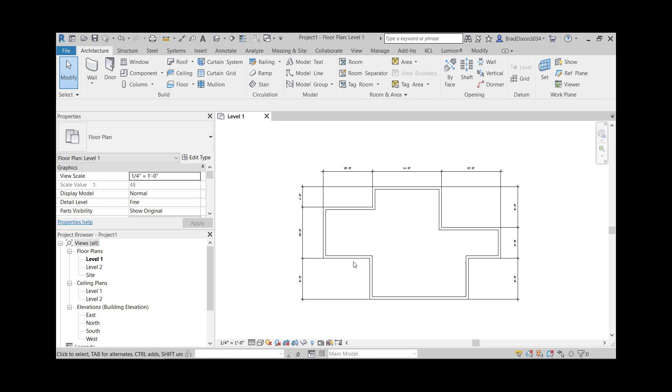constraint-driven dimensions. Whenever I'm laying out a floor plan, I just have a very basic floor plan here, someone might have sketched this out on a piece of paper and said this is kind of what I want for my exterior dimensions. So whenever I'm actually going to do this in Revit, I'm going to show you the workflow that I would go through. I'm going to start out with a generic 6-inch wall, and I'm going to start drawing this.

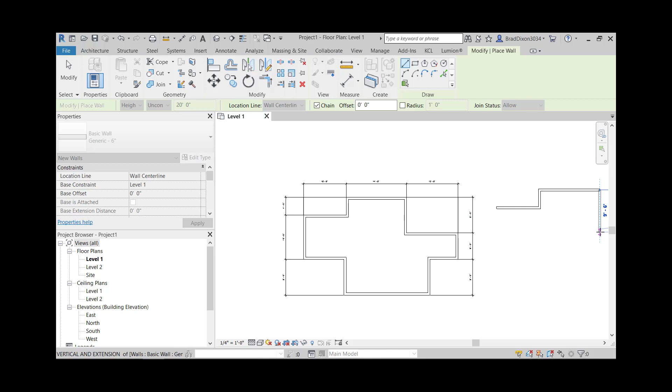A lot of people would spend a lot of time trying to get that first dimension to be 10, then the next dimension to be 4, then the next to be 14, or they might type those in as they're going, and then as I change things, those don't work anyway. So what I do instead, I don't use those temporary dimensions.

Instead, I just go around and get it close. My first one is about 10 feet, so I'll go there. Next one's up about 4 feet, I'll go there. I'll come over like that, drop down here, take this one over like that. I'm just kind of getting that similar shape that I have for the rest of them.

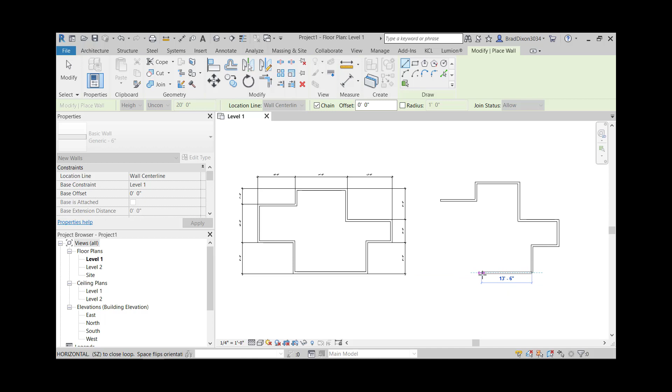So I'll go through and do this. Then, instead of using temporary dimensions, which show up whenever you click on the wall, what I'm going to do is add permanent dimensions at this point.

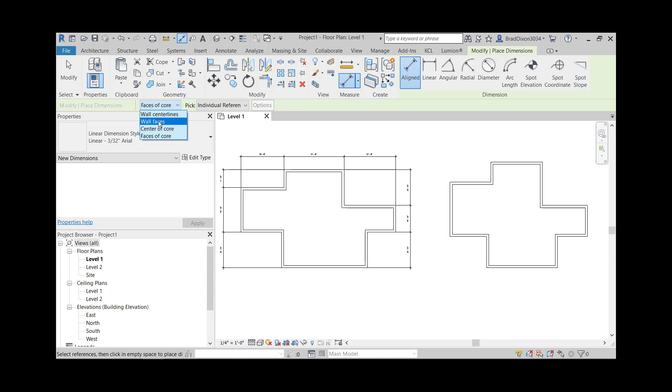I go over to Annotate, choose Aligned Dimensions. I come up here and make sure I'm going to use wall faces. I can't use the wall center lines for this. I'm going to use my wall faces, and pick the outside of the wall. I stay away from the corner because I don't want it to pick the wrong thing. I pick the outside face of that wall, the outside face of that wall, the outside face of that wall, and the outside face of that wall.

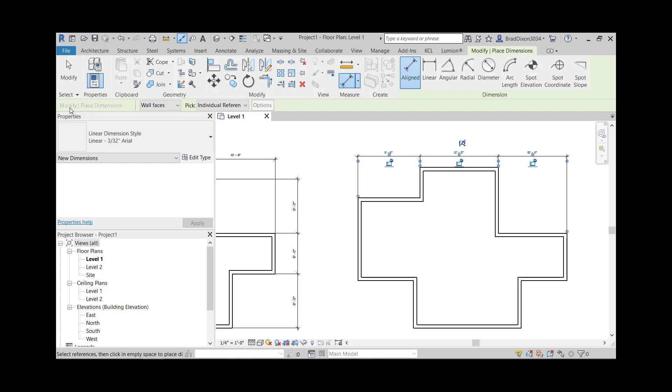I bring them up here and drop them. You notice I've also set the scale to 1/4 inch equals a foot, which is going to be my permanent scale. Rather than waiting until later to change the scale, I get that set up now so my dimensions look good. If I would have left that at 1/8 inch equals a foot, the default, it looked like that. So I'm going to put that back to 1/4 inch equals a foot.

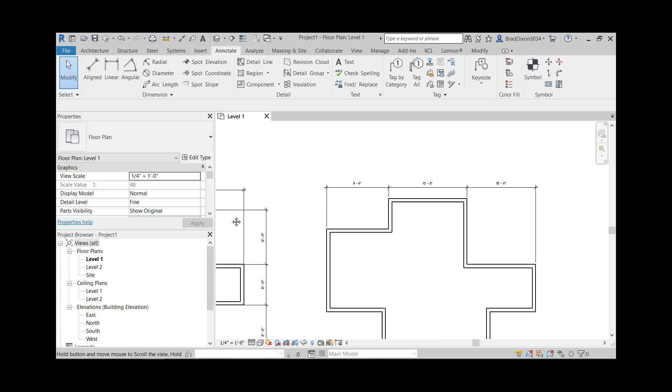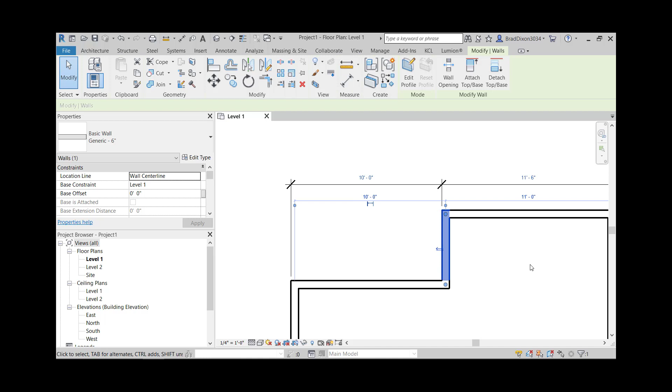It's another little tip. Then I'm going to move over, click on this one, make that 14, and then come over here and make this one 12. So it automatically forced those to be those dimensions. Now I'm going to do this side. Again, aligned dimension, and the nice thing about having this as the wall face, I can just click real quickly.

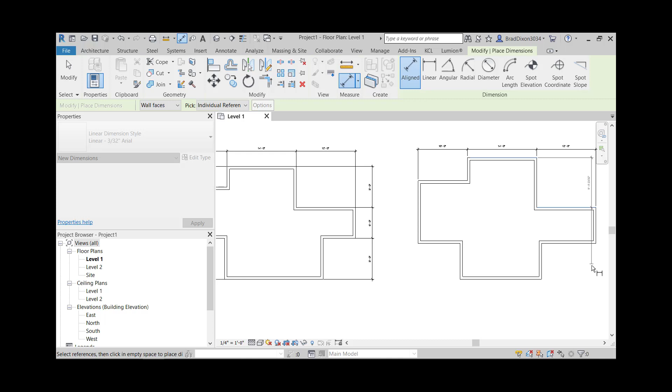Now in this case, I purposely left this one out, and I'm going to show you why in a second. So I'm going to zoom in on this. I have 8 foot and then 8 feet. I'll click there and click on the permanent dimension, type in 8. Then I'll click on this one, click on the permanent dimension, click 8.

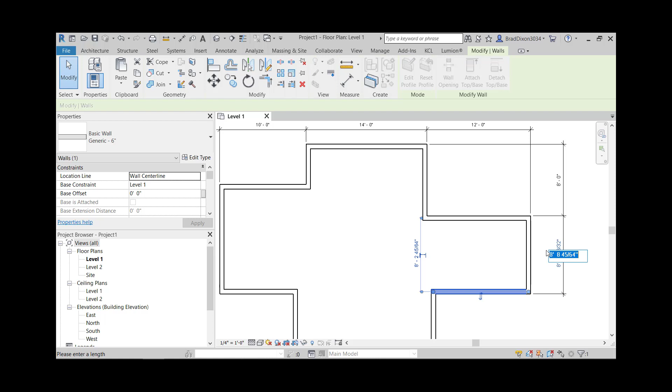Since I forgot that one, rather than coming back here and adding another one at this point, which I could do and get those lined up, instead I'm going to click on the dimensions, and come up here and hit Edit Witness Lines. Then I'm going to add the dimension that I want to add.

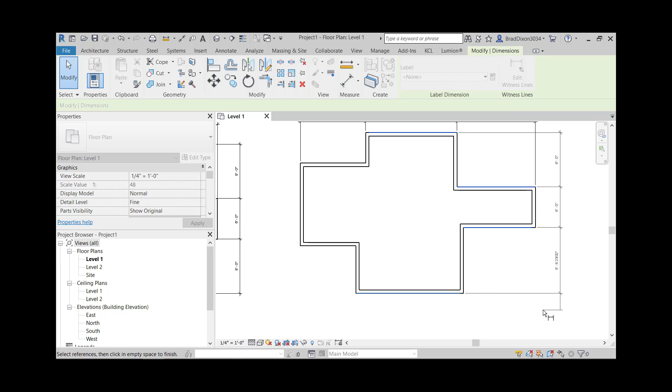So just the same thing, if I wanted to delete these ones or remove these lines, I could hit edit witness line and remove those. And I could have that overall dimension.

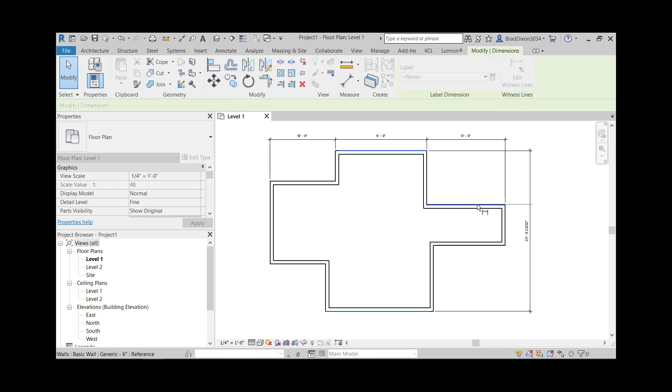Edit witness line, click that, and then I'm going to adjust this one to be 8 feet. I click on that last wall, type in 8, hit enter, and I'll do one more just for demonstration purposes.

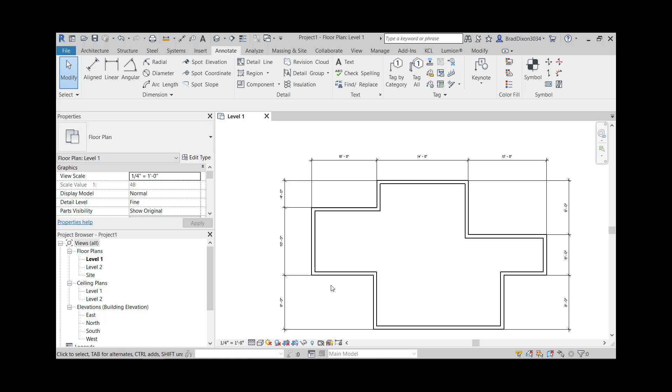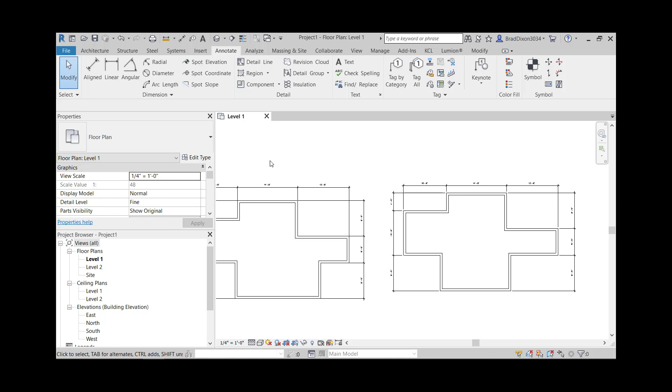And I have 4, 10, and 8. So very quickly, dimension from there to there, to there, to there, bring this out, click on this wall, make it 4, click on this wall, make the permanent dimension 10, click on this wall, and it is already 8 because this was correct. And that's a real quick look at how to do constraint-driven floor plans.